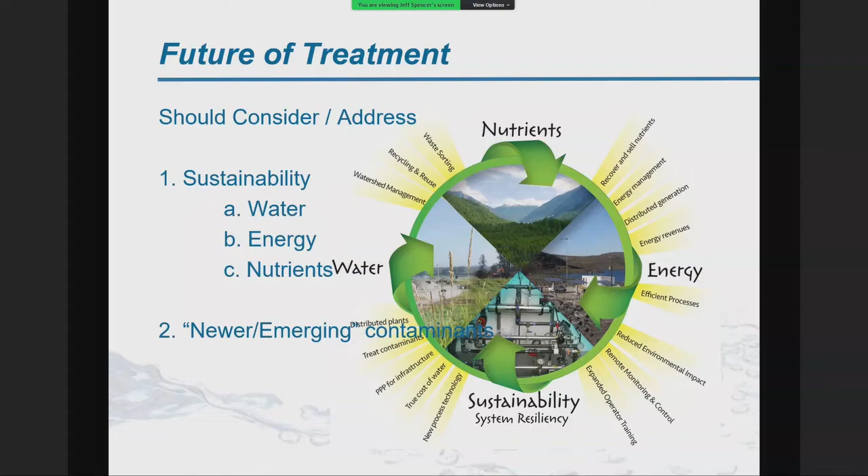So ultimately, I want to look at the sustainability concept with respect to incorporating technology. So looking at how we can better treat for water reuse, energy efficiency and reuse, and nutrient reuse and/or elimination. And then the second component I want to touch base on is the contaminant issue and how we can better ourselves with respect to treating our water and/or wastewater for the contaminants that come into our plants, and those that fall into the category of emerging contaminants. So some of these difficult to remediate compounds that can quite readily pass through a wastewater treatment facility.

Sustainability as well as environmental and health benefits can be realized when we incorporate better water treatment technologies. Technology can be used to improve existing treatment facilities as well as support a decentralized system. The use of small, modular, decentralized treatment plants can enhance the water and wastewater treatment scheme. As water reuse, nutrient reuse, and energy reuse continue to grow, decentralized plants become more practical, as centralized treatment is not always effective when considering resource recovery or reuse.

For instance, the cost to install pipelines that carry recycled water from a centralized treatment plant to the point of use can far exceed the cost of building a satellite treatment facility. Today's technology can reduce the footprint required of a typical centralized treatment facility, as well as support the installation of smaller decentralized systems. The implementation of newer technology can have a positive impact on capital and operating costs.

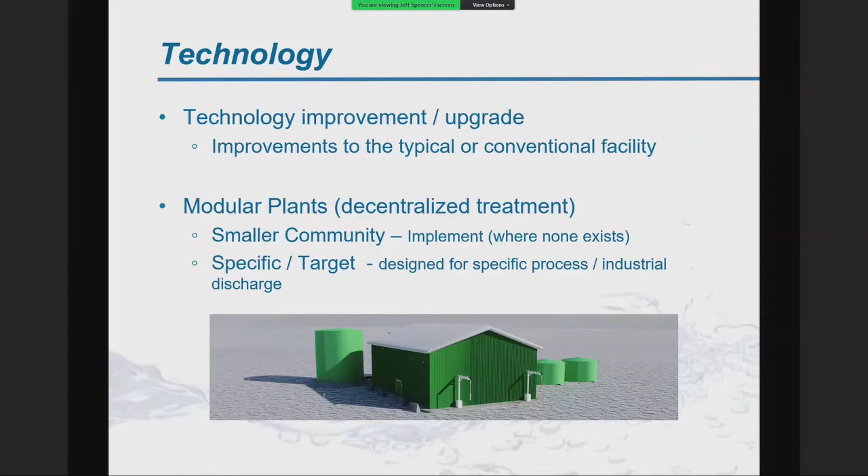Wastewater can be treated to various qualities to satisfy demand from different sectors, including industry and agriculture. It can be used to maintain the environmental flow and can even be used for drinking water. Wastewater treatment for reuse is one solution to the world's water scarcity problem. Water reuse frees scarce freshwater resources for other uses or for preservation.

So the two components that I want to talk about a little bit today with respect to water sustainability are, one, how we treat the water with respect to the environment. So if we're assuming environmental discharge, we want to ensure that we're treating the water as best as we can to reduce the impact on the environment where the water will end up.

And then the other aspect is the recycling component. So we're looking at water and treating it so we can reuse that water, and where and how we're going to reuse it. So whether it be for irrigation, back in for industry, or in fact for potable water use.

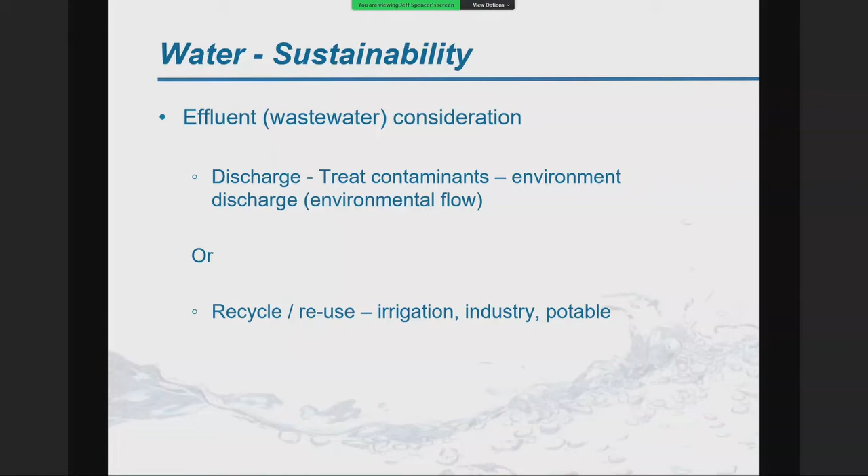Byproducts of wastewater treatment can become valuable for energy generation, making wastewater treatment plants more environmentally and financially sustainable. Incorporating technology can make our treatment plants more efficient, as well as improve energy capture. So looking at energy sustainability, there's some components that we want to focus on.

One is the plant operation itself, to ensure we're running as efficiently as possible. So we want to incorporate the technology that'll improve efficiency, incorporate things like AI, renewable energy sources. We want to implement remote monitoring and control. And then, of course, we want to make sure that all involved are properly trained to operate the system as efficiently as possible.

The other component with respect to energy sustainability is the generation or capture of the energy that's generated. So capturing, assuming it's methane coming off as the biogas, taking that methane and either putting it back into the system, the grid, so to speak, or reusing it on site. But the other component is capturing that methane to prevent the greenhouse gas emission aspect. So control it to prevent, like I say, the greenhouse gas emission itself.

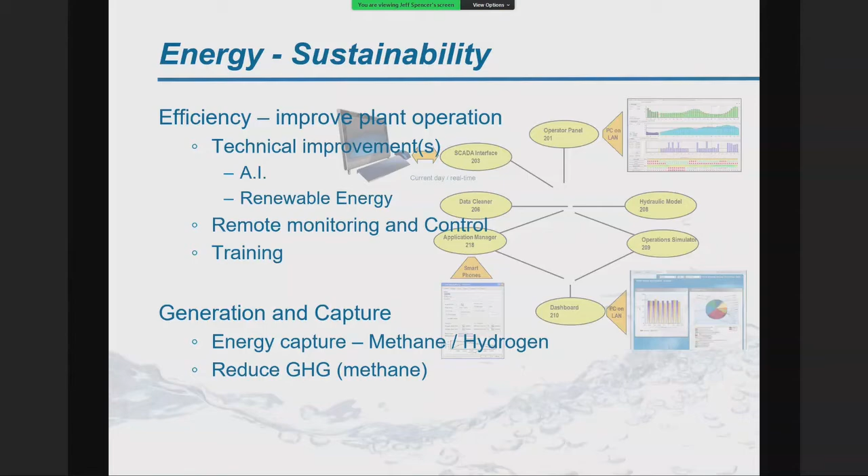Byproducts of wastewater treatment include nutrients that can be used for agriculture and farming. Capturing these nutrients from wastewater treatment can improve a plant's ecological footprint and environmental impact, as well as improve a plant's financial sustainability. So looking at the nutrient component of our wastewater, there's two factors. One, we've got nutrients coming in that can easily be reused for agriculture or farming. So we want to capture those and reuse accordingly.

But if we choose not to, we want to, at the very least, ensure that we've eliminated the nutrients or destroyed those nutrients. So we're not creating a negative impact on the environment when we discharge into our rivers, lakes, and oceans.

As part of the sustainable treatment strategy, wastewater and water treatment practices should consider the difficult to remediate contaminants. This includes the reduction and removal of organic compounds that can have an adverse effect on the environment as well as our health. These contaminants are known threats for aquatic ecosystems and human health and are becoming a major issue for water utilities. These contaminants are sometimes referred to as emerging contaminants.

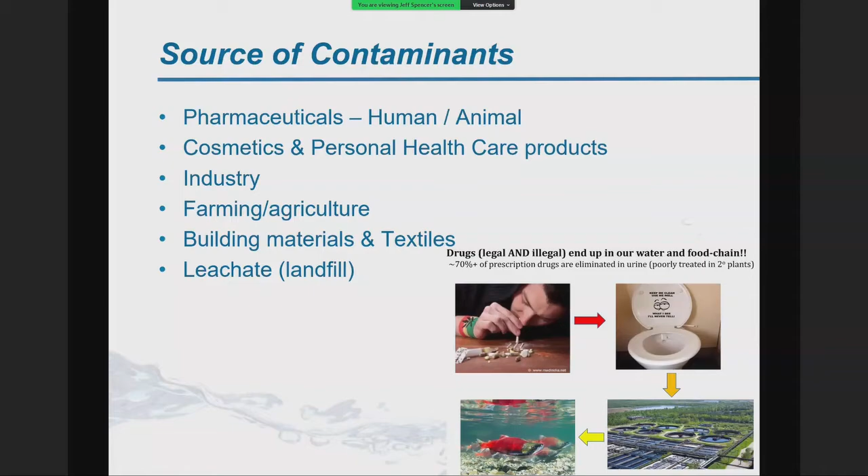Sources of these contaminants include pharmaceuticals, whether related to human or animal health, cosmetics and personal health care products, industry, farming and agriculture, building material and textiles, and leachate related to landfills. The next three slides will identify some examples of emerging contaminants. These are examples of difficult to remediate compounds that can pose an environmental and health threat. These compounds can pass through a wastewater treatment facility if provisions for the removal have not been made.

The list I'm going to go through is not exhaustive. I've selected these simply because they've had some notoriety as of late. So we've seen some of these names in media, etc. So I thought I would just compile a few and kind of go through them. Consideration should be given to these as well as other emerging contaminants.

So the first on our list is PFAS, the PFAS family anyway. The source is from firefighting foam, retardants, adhesives, and cosmetics. We're already seeing measurable amounts found in drinking water, and the PFAS can be linked to endocrine disruption, thyroid disease, cancer, and liver damage. Sulfolane is an industrial solvent. It's water soluble. Its effects are currently being studied.

1,4-dioxane is a solvent stabilizer used in personal health products and cosmetics. It's water soluble, resists biodegradation, and therefore has a bioaccumulation effect. It's known to be toxic with negative impacts to the nervous system, liver, and kidneys.

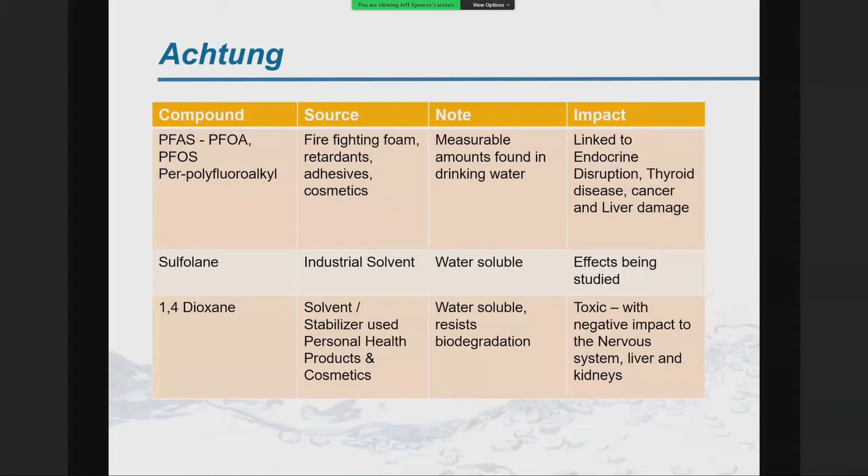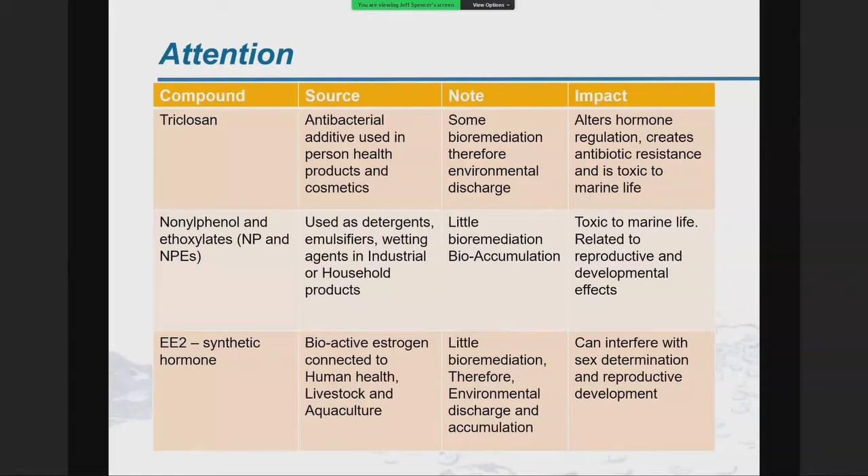So again, just a small list that I compiled just to kind of run through. Like I say, it's not exhaustive, but these compounds and others are considered the emerging compounds. These contaminants are difficult to remediate and should be addressed during wastewater treatment. So we need to provide a process step that adequately deals with these emerging contaminants.

Traditionally, a typical wastewater treatment facility focuses on reducing TSS, BOD, nutrients, and microbiological pathogens in order to safely discharge into the environment. The typical treatment plant is composed of a primary treatment followed by a secondary treatment. The primary treatment targets TSS, total suspended solids, whereas the secondary treatment targets BOD, COD, TOC, as well as nutrients, the ammonia and the phosphorus.

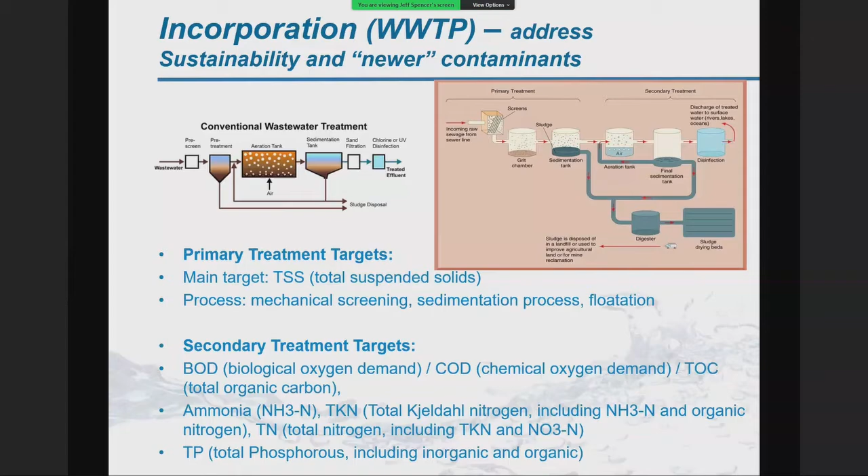Traditional plants do a good job at treating wastewater. However, when we view them through a sustainability lens and consider resource recovery, or consider the emerging contaminants, we can identify process steps where improvements can be made. The technological improvements or plant design can be considered based on recovery objective and contaminant type and/or waste source. The type of technology used will depend on the plant design objective. For reuse, it's the what, where, and how versus the discharge, where and how. Ultimately, what isn't reused and therefore discharged should be of a quality that best protects the environment.

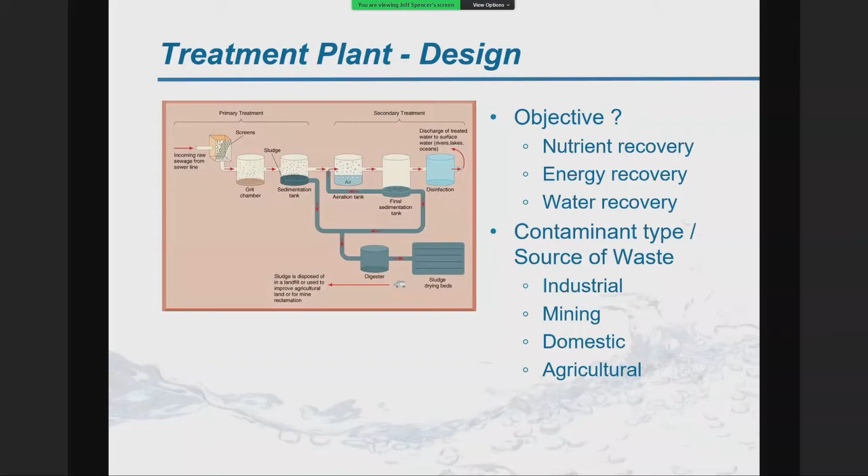So when we look at existing plants or we're looking to design a new plant, we want to consider our objectives with respect to nutrient recovery, energy recovery, and water recovery and design accordingly. But as well, we need to consider the contaminant type. What is the source of the waste, whether it be industrial, mining, domestic, or agriculture. Each can have a variance in the type of waste that ultimately makes its way to a plant, and therefore the treatment designed to specifically treat that type of waste or concentration of various species of contaminants, etc. Heavier loaded BOD, TSS, what have you.

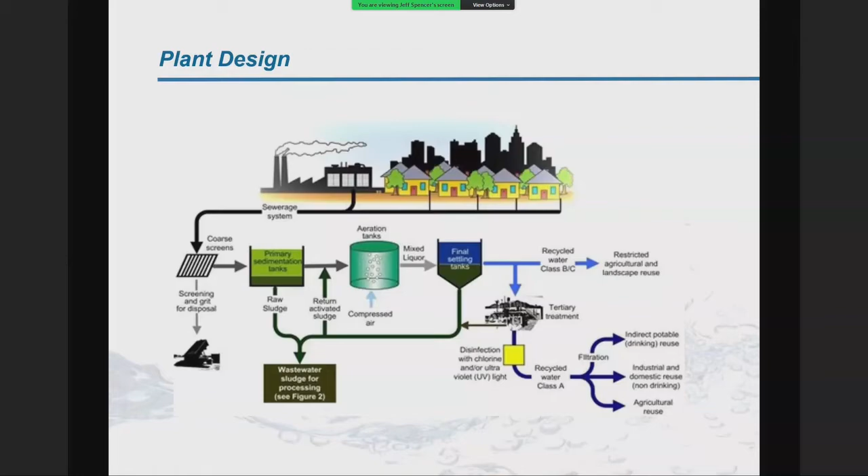This is just an example of a layout of a plant design, stretched a little bit, where you can see there's some highlighting of the water treatment component. So we could look at a plant like this and incorporate varying technologies to improve that component of the water recycling and how we would use it. As well, if you look at a plant design like this, you might break into some modular systems, one to handle the industry and do some pre-treatment before allowing the water into the main system to head to the centralized plant.

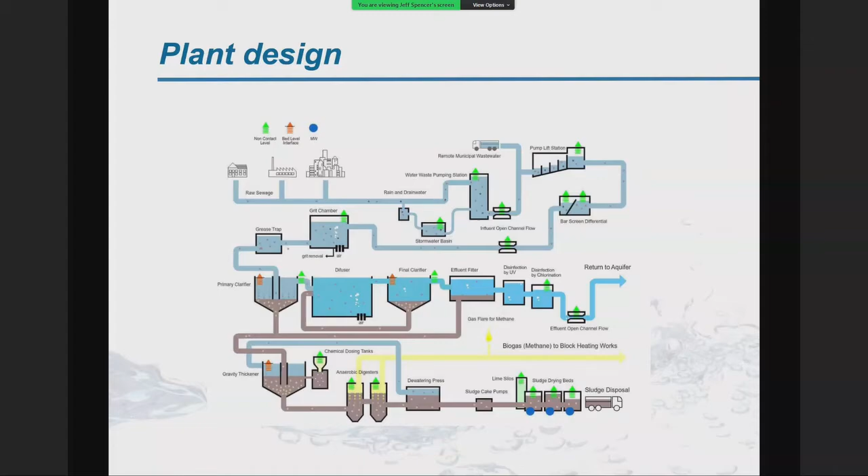The following are some technologies that can be incorporated into existing plants, and they're used to build smaller, modular, decentralized plants. These technologies can support our sustainability efforts, as well as improve the quality of any effluent that is discharged to the environment. It is possible to combine some of these technologies to further improve the water treatment process and/or improve any discharge. Some of these technologies have been available for many years. And again, I won't go into great detail about each, but simply wanted to touch on them with a brief description.

So if we're looking at wastewater treatment plants, and we're considering the primary and secondary treatment components, some membrane technologies can be incorporated. We can look at MBR, MBBR, and MABR. We can also look to DAF or SAF for some improvements. Chemicals, which we've been using for years, of course, but there's always improvements, and we look at the efficiency with respect to how we introduce our chemicals, etc.

And then looking at the effluent end of our water treatment, we can look at some technologies to better improve the effluent, polish it, if you will. We can look at some media technologies, activated carbon, ion exchange, modified media such as green sand or sulfur modified iron. We can also look to advanced oxidation processes, so AOPs. And finally, we can look to UV, all these helping with the final effluent quality. And then again, looking at how we plan to reuse or what we plan to do with that effluent.

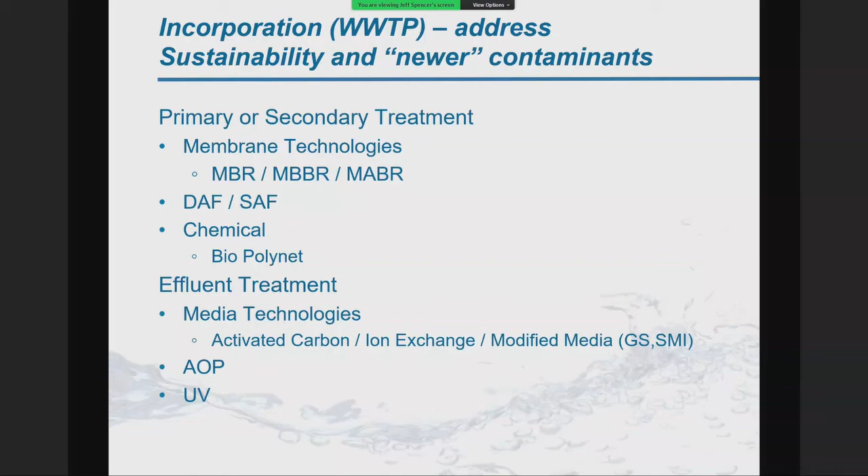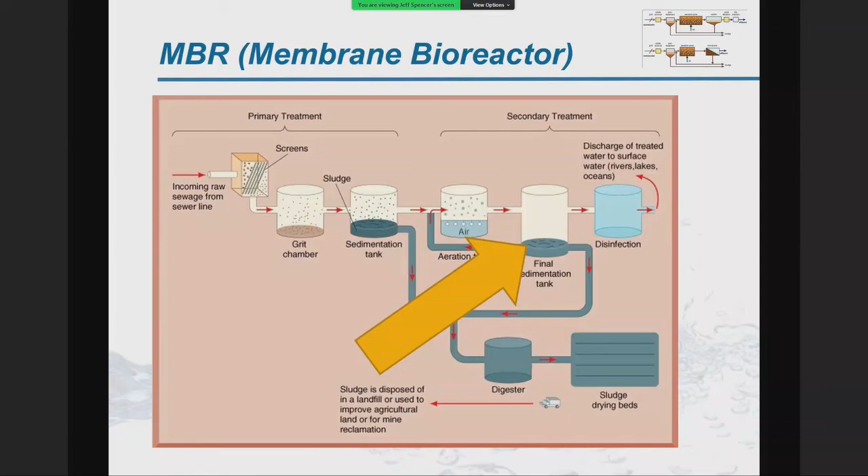The use of a membrane barrier layer to remove solids allows decoupling of a plant's hydraulic and solid retention time. So the HRT and the SRT are reduced. Unlike a conventional activated sludge treatment process that relies on sedimentation for solid separation, the MBR provides a definitive boundary layer that provides complete solid retention.

Membranes used in MBR systems contain microscopic pores that are significantly smaller than many pathogens and microorganisms, meaning a high level of disinfection can be achieved with just an MBR. Both solids and pathogens are retained by the membrane, providing a highly disinfected, low turbidity effluent. The combination of effluent quality, small footprint, and low life cycle costs make MBR a viable technology for today's reuse projects.

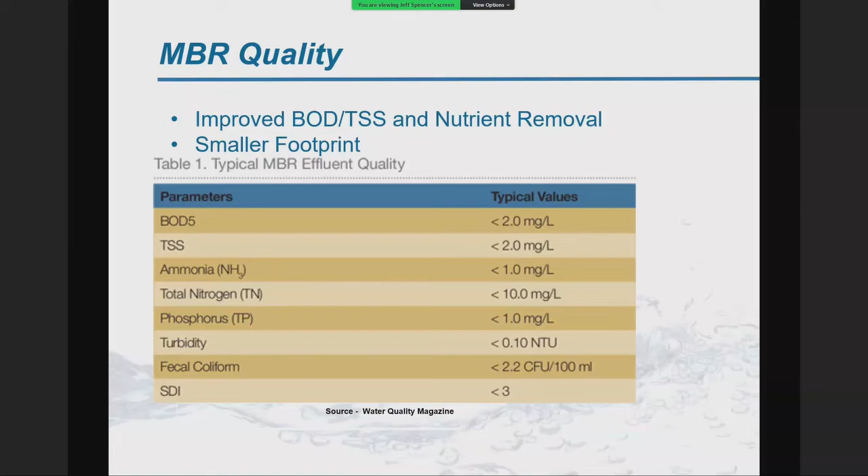A moving bed biofilm reactor, or MBBR, is defined as a biological process for treating wastewater with some unique characteristics that make it a beneficial alternative to traditional methods such as activated sludge or a trickling filter. The treatment capacity of existing wastewater treatment plants can be significantly enhanced simply by adding MBBR. The incorporation of MBBR promotes the use of smaller, modular, or decentralized facilities, which can reach significantly higher treatment efficiencies by using high-performance biofilm carriers. MBBR would be added in the aeration component in the secondary treatment.

Some benefits for MBBR are the footprint, so we can maximize footprints or reduce the overall space required for treatment. The maximized surface area leads to an MBBR aeration tank that can effectively treat the same amount of water as a much larger tank used in the traditional process. Simplicity. MBBR has the advantage of being simple. It allows nature to take its course, which minimizes the role of the operator. Low maintenance. The system is largely self-moderating, so users can trust it to operate effectively without the need for demanding ongoing maintenance. And it's efficient. MBBR systems can work much more quickly than conventional methods to treat the water. The hydraulic retention time, the HRT, for BOD and nitrogen removal with an MBBR is around 3 to 4 hours.

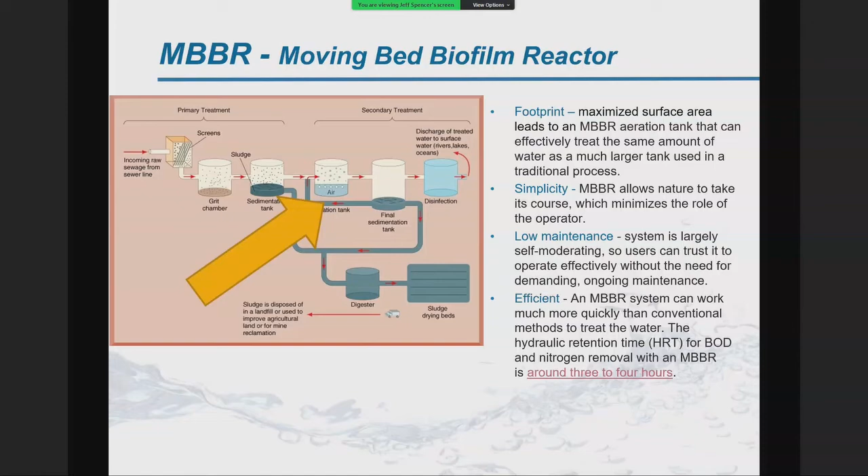There's 4 components to an MBBR system. You have the basin reactor. So the MBBR process takes place in a reactor or an aeration tank. Influent enters this basin for treatment; a second basin for further MBBR processing, or another type of water treatment process, can be used. You have the media itself, which is the heart of MBBR. So the basin is filled with thousands of these small plastic chips called media or carriers, and they occupy 50 to 70% of the tank. It's the chip design that maximizes the surface area. The chip itself, or the carrier, has the same density as water, allowing the chips to mix throughout the fluid rather than floating or sinking.

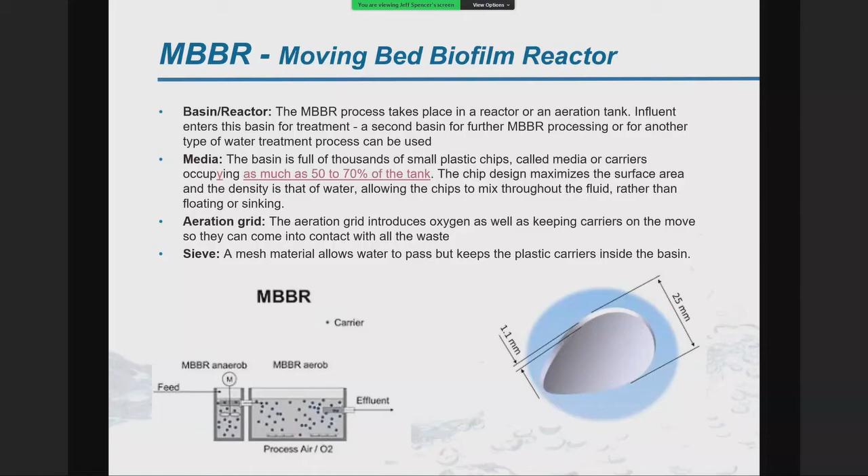The aeration component needs to take place. So you have a grid that introduces air into the system. And then finally, a sieve just prevents the movement of the carriers out of the basin of the reactor. So it acts like a filter. Effluent can move out, whereas the chips themselves stay in place in the reactor.

Membrane aerated biofilm reactor, or MABR technology, provides an improvement to aerobic wastewater treatment due to its highly efficient nutrient removal and its energy efficiency. The MABR provides highly efficient biological nutrient removal, resulting in operational savings and minimal footprint requirements that make decentralized treatment more feasible, as well as improve existing centralized plants. The MABR process employs a gas-permeable membrane to deliver oxygen to a biofilm that is attached to the surface of the membrane. It has the added bonus of intensifying treatment capacity and improving performance by increasing the biomass inventory in a given reactor volume. MABR technology is based on passive aeration, that is the diffusion of oxygen through membranes.

Small to medium capacity MABR systems save up to 90% on energy used for aeration compared to conventional plants. MABR's energy efficiency means it can be operated with alternative energy sources, making it an ideal candidate for decentralized units as well. So the main principle with MABR is the movement, and it's somewhat passive. High pressure is not required. So air diffuses passively across a membrane where biofilm is attached and an aerobic zone is created. And as oxygen is depleted there, further to the outside of the membrane, an anaerobic zone is created. And so in essence, you get a full nitrification and denitrification process, all while utilizing less energy to move the air and introduce it to the bioorganisms.

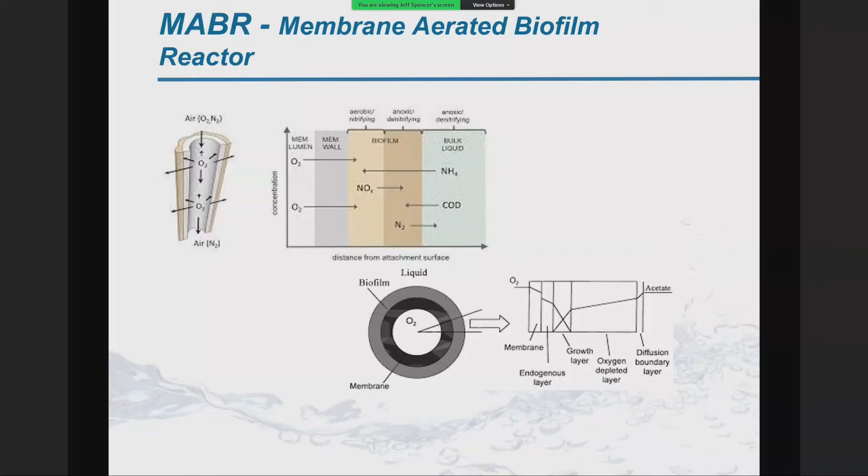Activated sludge treatment has long been used for aerobic wastewater treatment, but its aeration stage is particularly energy intensive and as a result expensive. Oxygen is typically pumped through diffusers to create bubbles, but most of the oxygen rises to the surface without being used, and valuable energy is wasted.

The membrane aerated biofilm reactor enables the upgrade of conventional activated sludge plants for nutrient removal and capacity expansion in existing tank volumes, while significantly reducing the energy required for aeration. MABRs provide an energy efficient alternative that provides a very high quality effluent.

So the MABR would be incorporated again in the aeration stage of the secondary treatment. The huge benefit to MABR is the energy savings in that aspect with respect to introducing air to the microorganisms, because it doesn't require high pressures. Little energy is required to move that air into or introduce it to the microorganisms that grow on the membrane itself.

So typical aeration through diffusion would be 70% of a plant's energy with only 10 to 15% transfer. That's with a typical aerating plant, and compare that to 85% with MABR. Utilizing MABR allows for a reduced footprint and increased treatment capacity, of course. And then by creating that aerobic to anaerobic zone, we see better nutrient removal, so nitrification and denitrification, as well as phosphorus removal. And overall, we see an improved effluent.

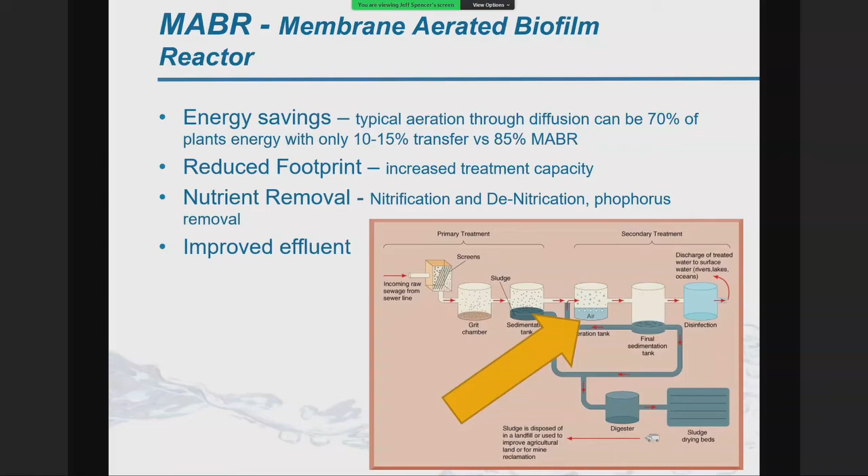Dissolved air flotation is a proven and effective physical chemical technology for treating a variety of wastewater streams. DAF systems are designed to remove total suspended solids, biochemical oxygen demand, and oils and grease from a wastewater stream. Contaminants are removed using a dissolved air and water solution produced by injecting air under pressure into a recycle stream of clarified DAF effluent. This recycled stream is then combined and mixed with incoming wastewater in an internal contact chamber

where the dissolved air comes out of solution in the form of micron-sized bubbles that attach to the contaminants. The bubbles and contaminants rise to the surface and form a floating bed of material that is removed by a surface skimmer into an internal hopper for further handling. SAF varies slightly from DAF in the way air and chemicals are utilized. There is less emphasis with SAF on the dissolving of air into the solution.

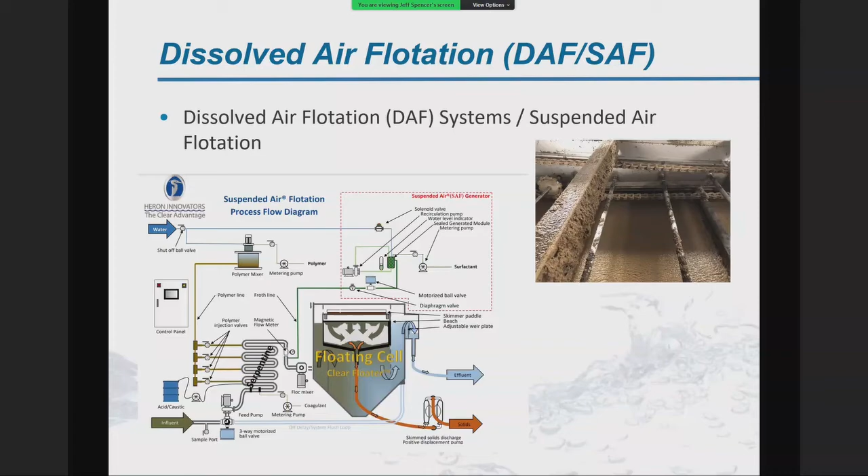Chemicals have long been used to support water treatment. Improvements can always be made, of course, and efficiencies improved. Chemicals are used for pH adjustment, precipitation, improved coagulation and flocculation, and oxidation. So therefore, chemicals are valuable in helping with nutrient removal and TSS and BOD reduction. As well, chemicals can be used for specific target contaminants. So we can target a specific organism or contaminant with appropriate chemicals.

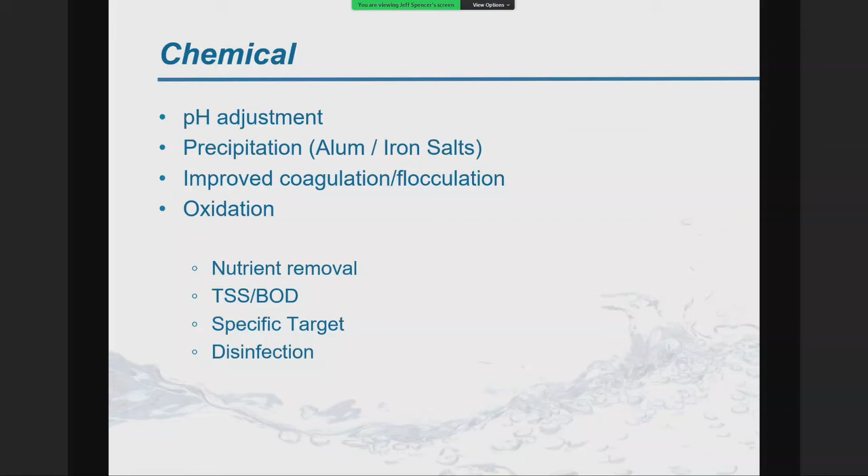An example being in the mining industry, we could look at sulfur dioxide to remove cyanide. That's a byproduct in the processing of gold. Of course, disinfection. So a chemical, chlorine, can be added to assist with the disinfection process.

An interesting and perhaps improved approach to chemical addition for the purpose of coagulation and flocculation comes from BioPolynet. BioPolynet's BNC formulation brings an all-natural product that can be adapted and modified to meet a specific need or application. So it's customizable. BioPolynet's BNC platform technology is a customizable approach to convert natural macromolecular biopolymers to strong coiled nanostructure network solutions. So BNC technology can be used for improving the dewatering of our sludge, tailings recovery, biogas, nutrient recovery, as well as precious metal extraction.

Benefits of BioPolynet's product are the optimum particulate size. So the nanoparticle geometry very efficiently penetrates and encapsulates target particulate substrates. The bifunctional action, simultaneous use of physical entanglement and chemical grafting, rapidly encapsulates target substrates. The substitution rate normally can displace incumbent synthetic chemistries on a 1-to-1 basis or better.

And of course, the green chemistry component, the product is all natural. So we are improving the biodegradability and not introducing harmful compounds, if you will, to the environment when we dispose of the sludge, if we dispose of the sludge and don't process further.

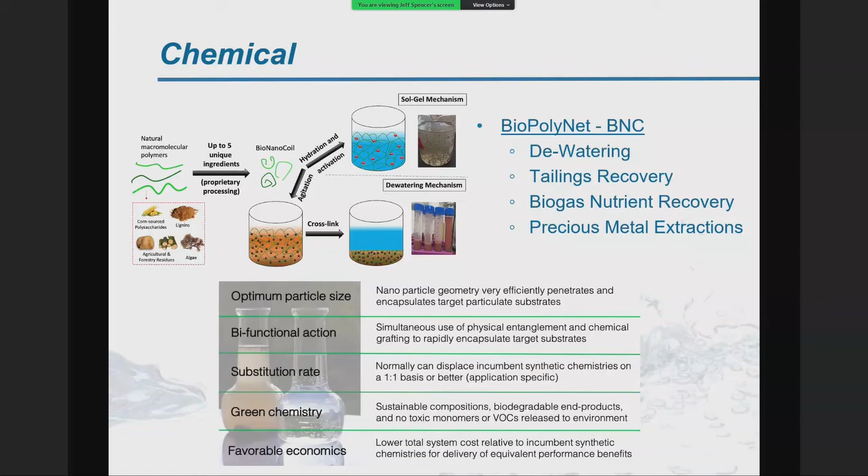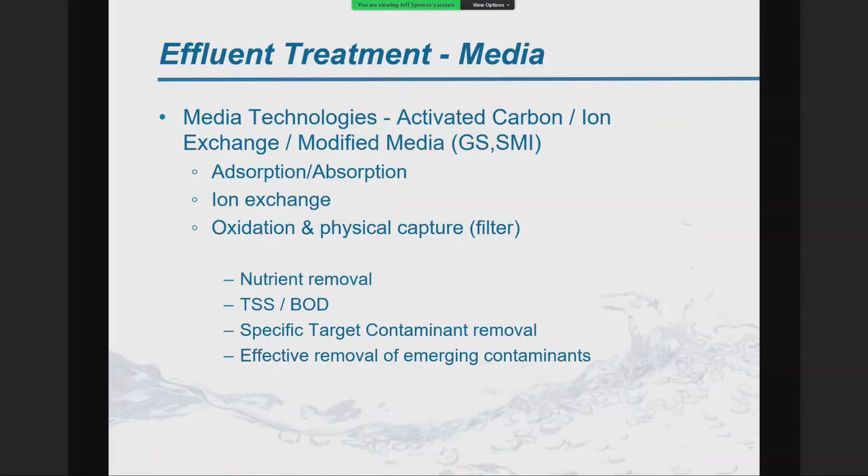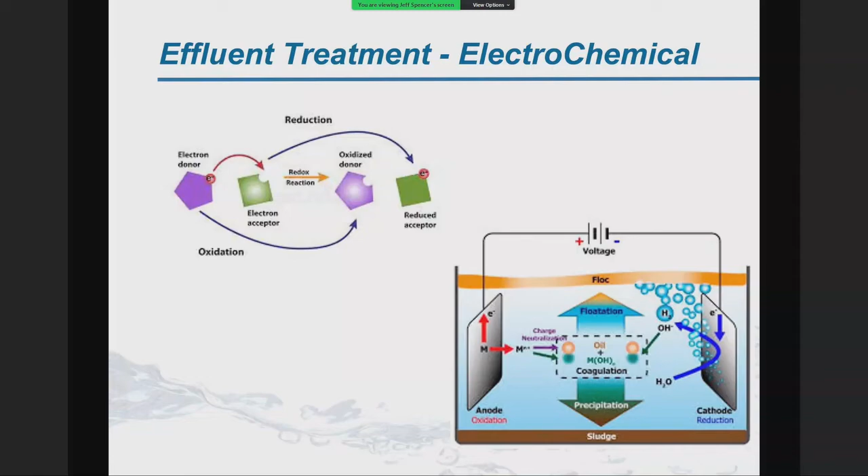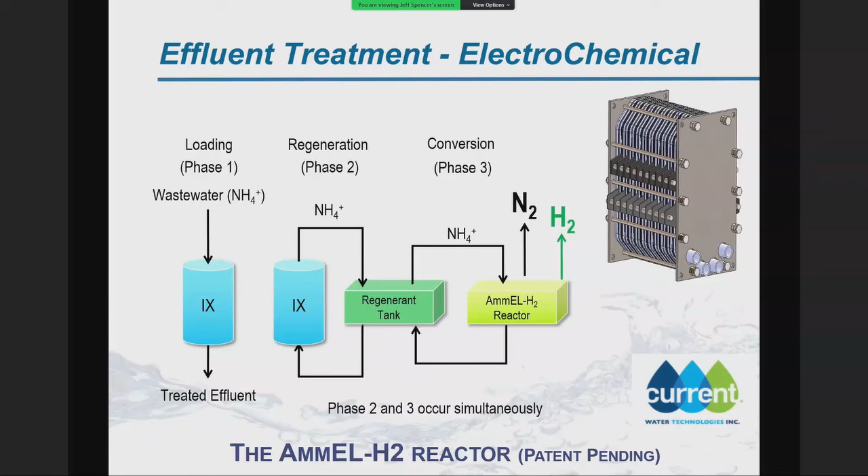Just a quick layout of the phases of this technology, and again, provided by Current Water Technologies. So the key benefit here, of course, is the nutrient removal, in this case ammonia, and the byproducts that are created, running straight to nitrogen gas and hydrogen.

So the benefits, again: conversion of ammonia into environmentally friendly nitrogen gas, permits high H2 hydrogen production and high ammonia removal rate, compatible with renewable energy power resources, does not produce nitrate or the greenhouse gas N2O, achieves total ammonia concentrations less than 1 milligram per liter in treated water.

Efficiency is not affected at low temperatures where biological systems are ineffective or slowed down anyway. No fouling or biofilms or inorganic materials. Able to operate intermittently without startup delays, fully automated with low maintenance and remote monitoring.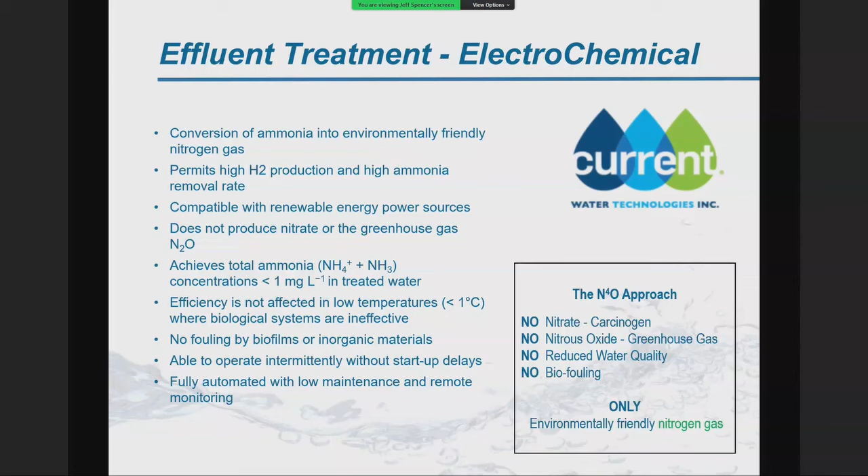Boydel offers an electrochemical process that isn't necessarily limited to the effluent. Through a two-zone flow-through process, Boydel's electrochemical process can effectively treat raw wastewater with minimal pre-treatment. Screening is all that's required. The two-zone process includes electrocoagulation and electrooxidation that leaves a sludge that is odor-free with 30% solids composition.

The technology can be used to treat sludge from existing centralized plants with a cost saving of greater drying capacity. So a huge plus for Boydel's technology is the byproduct sludge, the dryness, if you will. So the waste concentrates in 30% solids, which is an improvement from a typical 20% solid composition. And of course, the technology is effective at removing BODs, CODs, TSS, heavy metals, etc. Small footprint is a huge benefit as well.

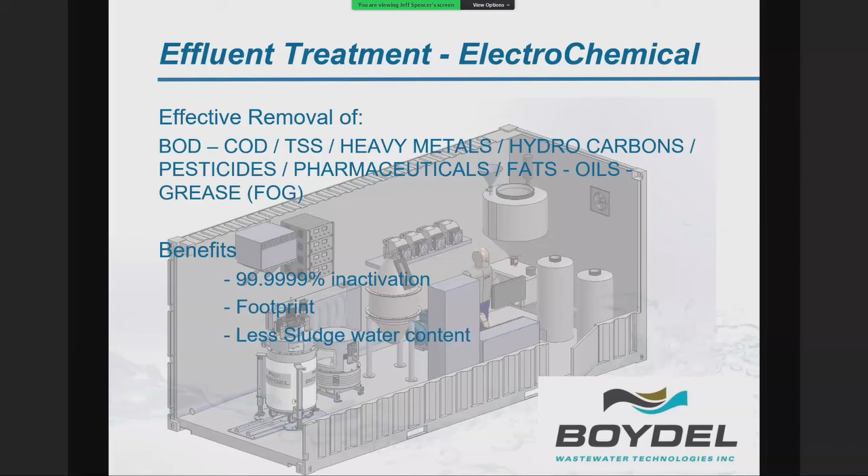But again, just to reiterate, this technology can be used on the effluent end as well as on the front end. So it can accept raw water with minimal sedimentation treatment. So I think 1.3 millimeter sediment filtration is all that is required.

AOPs are aqueous phase oxidation methods consisting of highly reactive species used in the oxidative destruction of target pollutants. AOP creates a more powerful and less selective secondary oxidant, the hydroxyl radical, in the water. This secondary oxidant can cause the oxidation of most organic compounds until they are fully mineralized as carbon dioxide and water. The hydroxyl radical has a much higher oxidation potential than ozone or hydrogen peroxide and usually reacts at least 1 million times faster, thus leading to a smaller contact time and footprint.

Current treatment practices in existing wastewater plants struggle to eliminate emerging contaminants and pollutants. AOPs, thanks to their high oxidation potential, have proved to be an efficient solution for the removal of persistent organics.

So of all the work that BI Pure Water does, as I indicated, we choose the best technology when we build our systems. There is one proprietary piece of technology that we have, and that's Biperliminate, which is an AOP process. It's an electrochemical process, and a hydroxyl radical is created, and it is effective like other AOP processes, which would utilize UV and ozone or UV and a peroxide. Our AOP process, like theirs, is effective at removing those emerging contaminants that we discussed.

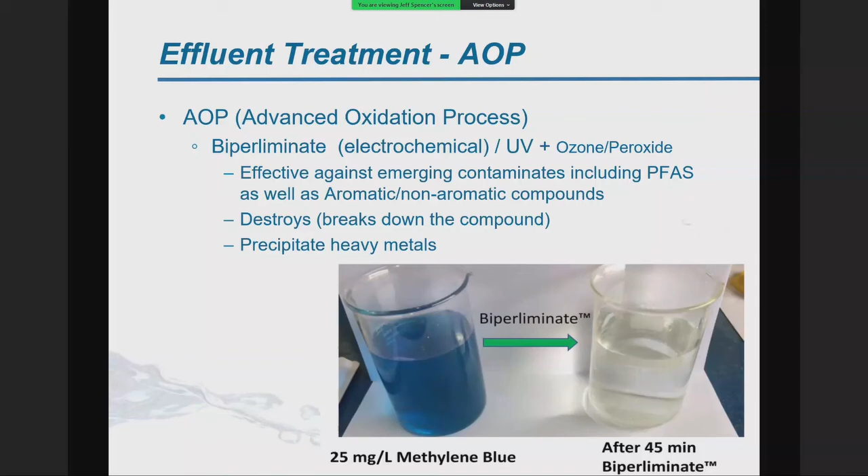UV has proven to be an effective method for the inactivation of microorganisms such as bacteria, viruses, molds, and pathogens without the use of chemicals. UV can also be used for the removal of organic and inorganic contaminants, including chlorine, ozone, and total organic carbon. UV technology can be used in place of chlorine disinfection. UV technology requires no storage, handling, or transportation of toxic corrosive chemicals. UV is effective at inactivating a wide range of microorganisms, including chlorine-tolerant pathogens. UV treatment can meet water reuse requirements in order to satisfy sustainability objectives.

Of course, UV technology has been available for years and years. I make mention of UV, more highlighting UV with respect to the newer high output, low energy closed vessel systems. These systems offer smaller footprint versus chlorine contact tanks or open channel UV that's currently in place at plants. There's an ease of maintenance associated to this type of UV. Low pressure loss, so moving water through the UV, there's lower pressure loss and lower energy consumption.

And of course, by utilizing UV instead of or in place of chemicals, more than likely chlorine, we have that added benefit of not creating disinfecting byproducts. So we're eliminating that component that might discharge back in the environment. And of course, no pH correction is required when we utilize UV.

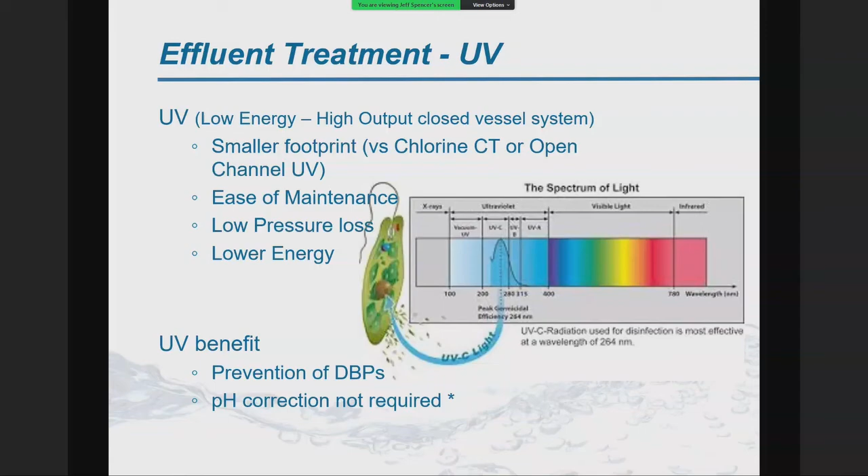We can anticipate the advancement of LED UV. LED UV exists, but is currently used only for low volume treatment, therefore not compatible with larger wastewater treatment plant volumes or water treatment plant volumes for that matter. So LED technology is around the 2 gallon per minute flow rate, but we, let's say, eagerly anticipate further development of LED technologies so we can treat larger volumes of water. Of course, the benefit of LED will be the energy savings, so making energy consumption less, so we'll be more efficient.

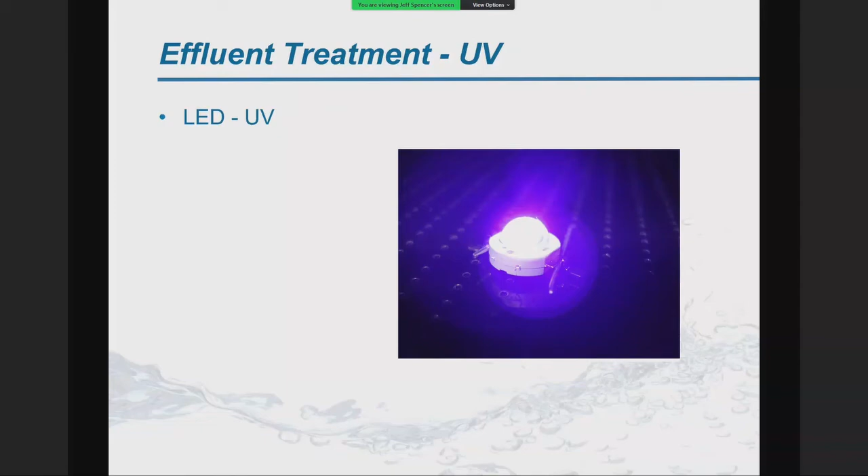Up until now, I've mainly been focusing on the wastewater treatment plants. I want to touch base a little bit on the water treatment side of things. This is a schematic of a typical water treatment plant in the distribution system. The big components with respect to a water treatment plant come from the source itself. So where is the source water and what are the specifics regarding physical characteristics, chemical characteristics of that source, and what treatment is required to bring the water into spec.

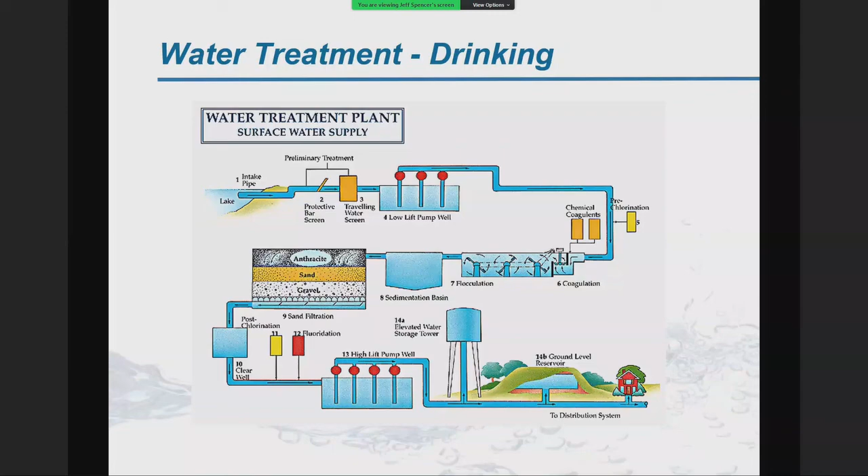And of course, the other aspect is contaminants that are harmful for human consumption and how we can ensure that they are removed and or treated. So we need to select the appropriate technologies to make our plants more efficient and remove the specific contaminants, etc., that are found in our source waters. For the most part, the same technologies used in wastewater treatment can be applied to water treatment. The focus with water treatment relates to efficiency improvement while minimizing any waste.

Water treatment processes will also need to address the emerging contaminants, especially for recycling wastewater, as some of these emerging contaminants previously mentioned have already made their way into our water source. Any treatment process should also prevent the creation of harmful disinfectant byproducts. Therefore, the appropriate technology will be required to remove any precursors. So the newer technologies will fall into some of the same categories.

Membrane technologies. There's some improvements with respect to the membrane material, if you will, ceramic versus titanium versus stainless. But a big component to the membrane technology will be how we treat the backflush water. So membranes need to be periodically backflushed, cleaned in order to continuously operate or utilize them. We want to trap, capture and reuse that water. It's a huge component. So in the end, we're making our system more efficient. So there will be some solid waste, of course, if any solids are removed in our process.

And then all liquid waste is recycled back into the system. So we don't see this discharge or loss of that water.